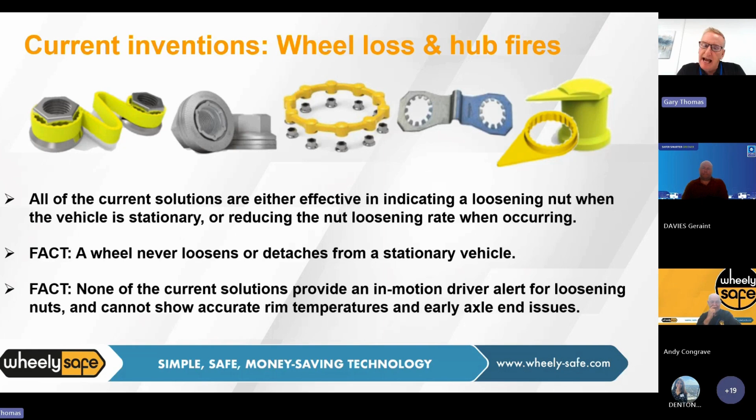And now what we've developed, and what we're rolling out globally due to the demand and requests outside the UK, we've got full connectivity. So engineers, the office staff, everything's fully transparent, to the point that you can set our systems up so not only does the driver get advanced notifications, the engineers now are getting advanced notifications before the driver even gets their preset alarms. So it's saving a fortune on breakdowns. But Andy will speak to you about the connected shortly.

Now, I've got a few gory slides coming up just to show you the gravitas. And we didn't realise how bad it was. Obviously, we live on a little island, and we didn't realise how bad the situation was outside the UK.

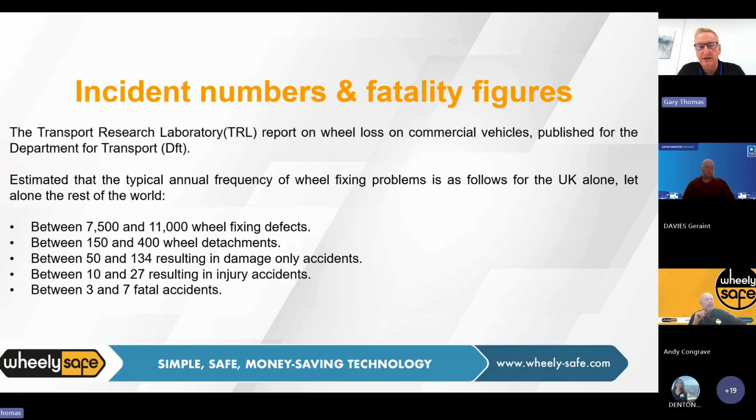But these are figures, documented figures within the UK. The unfortunate thing is, these are recorded incidents. I know, and our team have spoke to thousands of fleets over the years, and once they know where you're from, they open up and they do say - and I'll hold my hands up as well, I'm speaking from experience - if you can avoid reporting a wheel loosening or a wheel loss incident to the authorities, you will, because the last thing you want is them crawling all over your business. So I can tell you now, these reported figures you can probably multiply by 3 or 4. Obviously the fatalities and things like that you can't hide, but the wheel fixing defects is so much larger than what's reported.

Moving on to the next slide. Now, I've put these in here - these are just some of the fatalities within the UK. But beyond the UK, it's even worse. We're well governed and regulated by the DVSA and the traffic commissioners, but accidents still happen wherever people are involved. As I say, I've already hit you with the two scenarios, or there's mechanical failures involved. Things can happen.

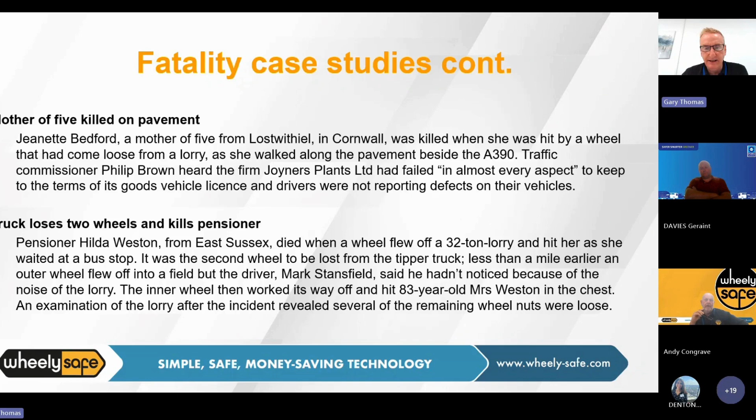Just going back - as I say, I've put these slides in there, but these are reported fatalities, unfortunately, that are out on the internet. The other interesting thing, as we've been going to various inquiries outside the UK, you realise the full gravitas of how big wheel loss and hub fires are.

We've got the no win, no fee solicitors and legals gathering pace within the UK. Litigation seems to be gathering pace. As I say, this is what's going on in America. In Canada, it's now in the majority of the states an absolute liability law for any wheel loosening or wheel loss - such is the problem over there - to a situation where it's fines of up to $50,000 just for loose wheel nuts.

A bit of good news for ourselves, and I can share this because it's out now - we've just been approved for Japan. Such is the problem in Japan as well. We've been doing trials for a period of time, and the Japanese government have now approved our systems for fitment in the Japanese fleet world, and they're funding our products to be fitted to Japanese vehicles as well. So it's not just a problem within the UK, it's a massive global problem that we finally close.

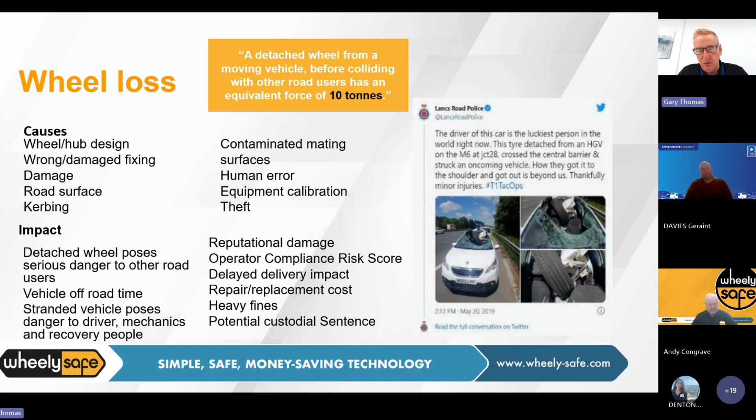That particular incident - the gentleman who was driving was about to take his 4-year-old son, who was on the journey as well, but at the 11th hour, for whatever reason, he declined. That particular truck wheel went straight through the window into the passenger side. The actual driver came away with just a few bumps and grazes, believe it or not. He was very lucky, but God knows what would have happened to the child in that particular incident.

Now leading on to - that's the wheel loss side of the business. Another interesting problem that we finally resolve is hub fires. Now I'm going to bring Geraint in, but I just want to quickly allude to this. There are situations, as I say, where this particular problem is more prevalent if you're not on top of your maintenance.

I went to a situation last year, and it was a double-decker trailer, and the operator told me that he'd had the hub fire, and he could have fitted our low-cost system, which would have alerted him to the fact. We believe it was a bearing failure, but what had happened - he said the actual incident had run up a bill up to £1 million for him because of the situation. He'd lost the load, he'd melted the motorway, the fire brigade came out to douse the fire, the water ran down into a culvert, so the guy had got environmental health all over him, the DVSA and the health and safety executive. But as I say, we can finally close that situation again now, because we've got something that covers every single reason behind that.

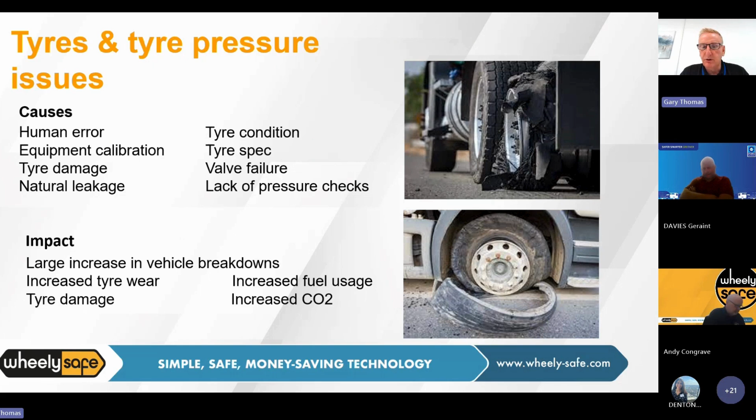The other cash cow as well is the tyre pressure monitoring system. The one thing I always say, even if you didn't have our system, is get yourself a TPMS system. It's the biggest cash cow going. I didn't realise the gravitas behind it, and I've run thousands of vehicles. God knows how much money I've cost the businesses I've been working for previously by not optimising the tyre pressures, reducing the life, and obviously the fuel wastage by running tyres on low pressure. It must be astronomical.

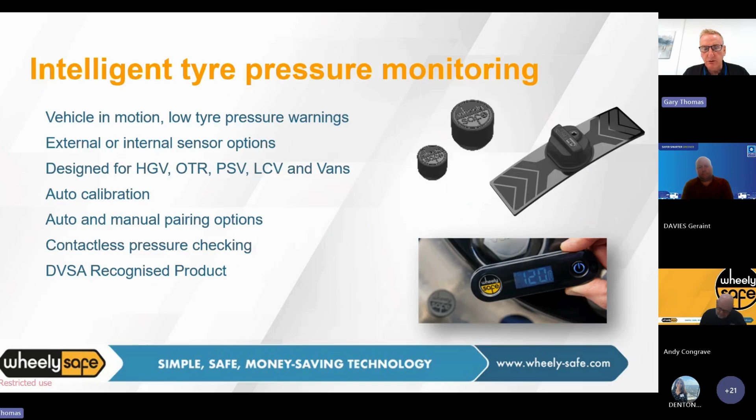So these, as I say, these are all things to move on with. Just moving on, I can talk to you about the monitoring system and the sensors, which we can explain.

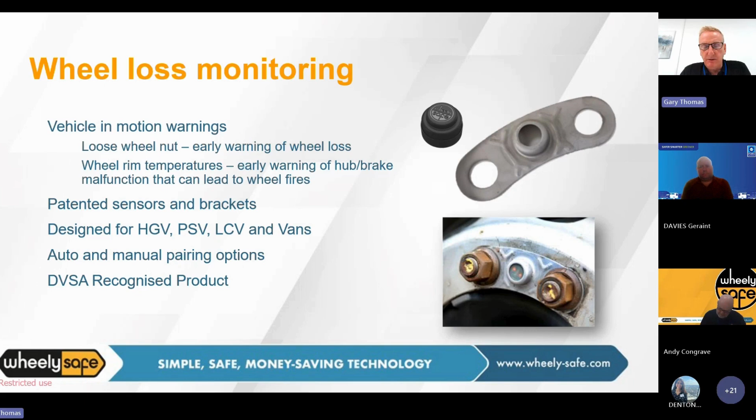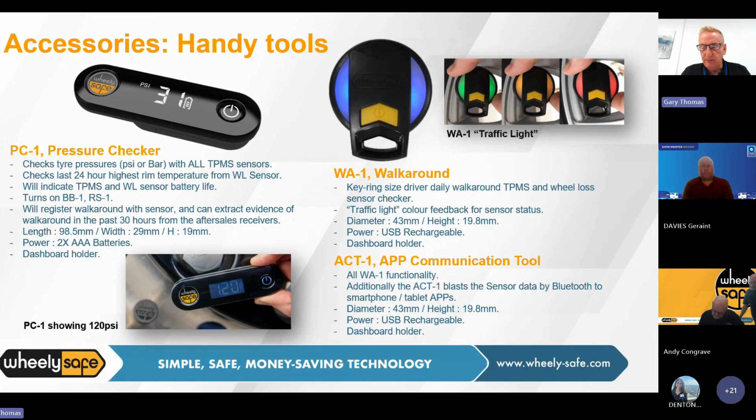We've also got some additional very low cost accessories for your drivers and your engineers. Again, we can delve more into those once you've come back to us. But I want to move on to the major part now. Now we've taken it away from the driver only system after many years, which is the Wheely Safe Connect system. So I'll pass this over to Andy now, if I can.

Will you be bringing your microphones off, Andy? Will you be bringing in the connected slide, or do you want me to? Yeah, I'll do it now. So if you come off. All right. Stop sharing. Okay. Can everyone see that? Yeah. Yeah. Good afternoon, everybody.

Thanks for your time. Okay, so what you'll be able to access from the vehicle, and this is one of our development partners, so they're quite happy for us to share this information. It's a very simple T-card system, and because of our background, we've designed it in such a way that it's only going to report a problem when you need to know. There's a lot more information behind the dashboard, but generally you'll get an alert which will come through on an email, and it'll also come through on the screen when there's a problem you need to deal with.

So as an example, if we click on a vehicle, we've got a typical 4x2 rigid here as an example. This has got 6 TPMS sensors, and it's got 8 wheel loss sensors, so 2 on every outer wheel. And as you can see listed here on the left hand side is the summary of the tire pressure monitoring sensors. Now we have got the capability of putting these sensors into a location, and that's a choice you can make locally. They will normally come displayed with an ID number, which you can then add the wheel location with a click of a button.

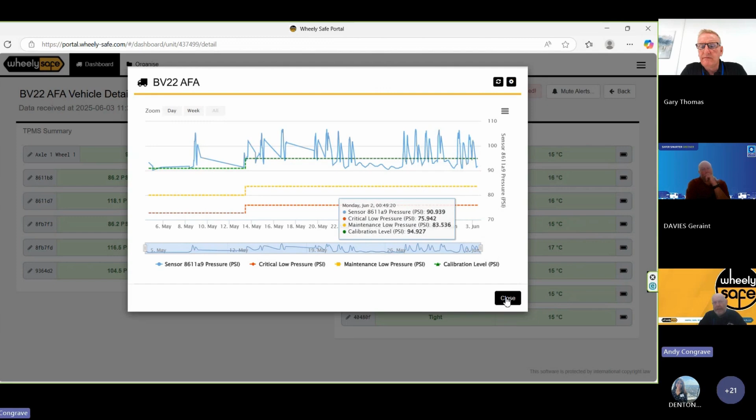You have got the capability of actually organising these parameters. There's an opportunity there where we demonstrate this to you. You can actually change the parameters of the alarms. The ones that are set there are the standard 12 and 20%. You can change them to whatever suits your operation or your business. In this column, we've got the current temperature of the tyre, and then we've got the battery life of the sensor. Again, all of these will send a message to you if there's a potential problem.

So, for instance, if you've got a pressure that's dropping slightly, you can look at that and make a decision of whether that's going to complete the journey before it becomes unsafe or unusable as a vehicle. Now, you'll see at the top, Gary mentioned earlier about there's an option. Our accessories, if they're used on the TPMS sensors, whatever time a vehicle check is done, this will be recorded and we can tell whether the vehicle's been checked in the last 24 hours, and that is auditable. So if we want to look at a vehicle that may have had an incident, we can look back at the data and prove that a driver did a walk around and at the time the tyre was in a serviceable condition.

The box itself will update every 30 minutes unless there's a problem, and then it's every 3 hours when the vehicle's stationary. So we can still get data coming through during the evening and the early hours so that you can identify a problem before the vehicle was due to be used out in service.

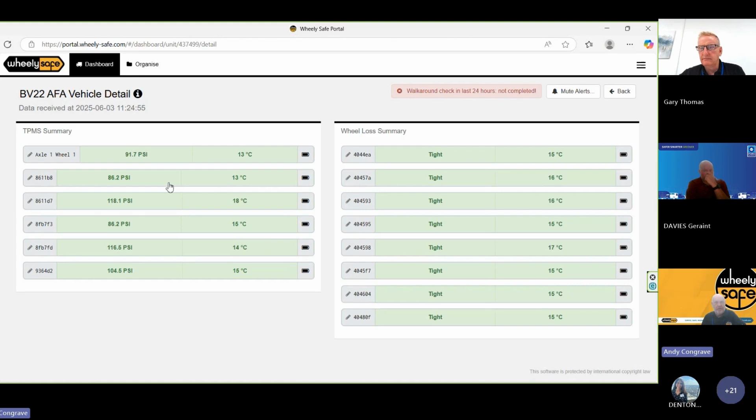This dashboard can be shared by as many people as you want in the team, and also the alerts can go to as many operatives within the business as you wish. Okay, I think that's it.

Just stop sharing that. Is that back to normal? Yep. Thanks, Andy. So I'll go back to sharing my screen. Bear with me. Is that back on, yeah? Okay. So I'll just get back to the connected stuff where Andy came in.

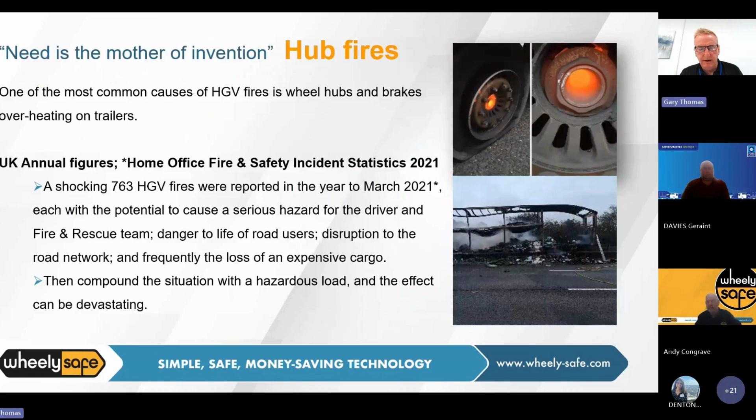So as Andy said and illustrated, everything we do is simple. Me and Andy and a lot of the team are all from the fleet sector ourselves. One of the groups I worked for, I employed a permanent telematics person who was just looking at TV screens. Didn't need to. We do offer drill down reports. You can micromanage your vehicles as much as you want to, but everything's simple.

We have a simple screen that offers alarms either on your computer or on your phone. You'll get an email. It's entirely up to yourself. And as I say, that's years of our fleet experience and speaking to a lot of fleet people, the issues they've had with some of the telematics screens. So simple's best with all of us. Hence why the products that we've developed, we've worked tirelessly on making sure that they're very easy to use and very easy to fit.

The other beauty with the systems, for example, our TPMS sensors, we designed them as a retrofit, which do have OEM applications, telematics applications. But when I used to cascade a vehicle out of my fleet, the OEM system used to go away with the vehicle. Ours is a plug and play system. So when you've purchased the products, they're yours for life. We're not a telematics company. The data cost is just a means to an end for us. That is cost.

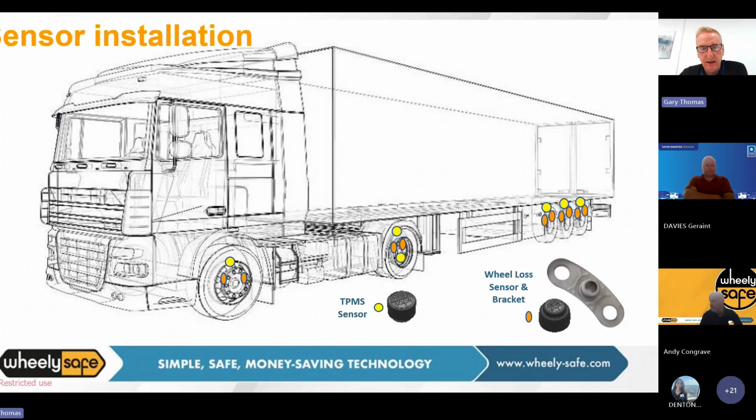So moving on, when we come out to fit the connected, well, we don't fit the connected system. It's easily connected by your engineers, but we do the training. It's just a matter of fitting a box and the in-cab display and then the sensors.

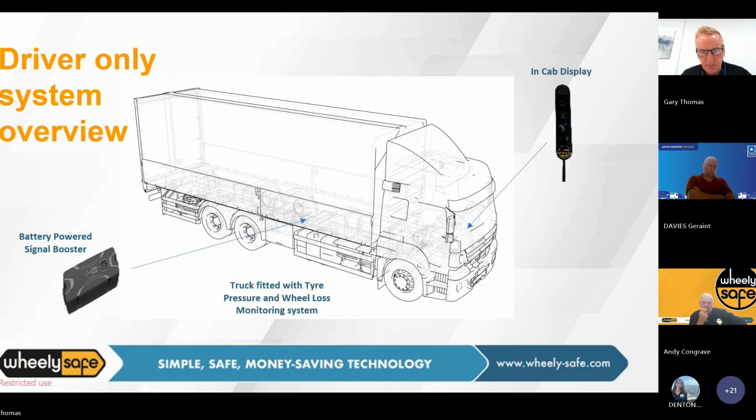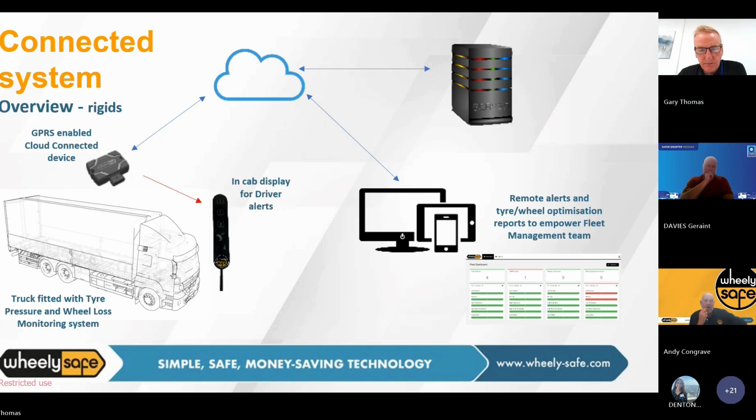And then what happens is that little M2C box, as we call it, machine to cloud, gathers the data from the sensors and flicks it up into the cloud, and we either connect to your existing telematics provider through API, or you come through our system if that's your preferred route. And then, as Andy's already alluded to, from that you get all the data.

But what we're allowing the driver to do is activate the sensor, and that key ring works on a traffic light system. It either goes green, amber or red. Green means the tyre's good to go because it's still within the pressure you set it at. Amber, as Andy said, it's dropped 12%, or if it's red, it's dropped 20% or more.

But what it does, once the driver has checked all the TPMS sensors, it activates to say back at the office that the driver has undertaken a full walk round check, because they've had to physically activate the TPMS sensors. Now, I used to do gate checks with my fleet managers, and I used to argue the toss with the traffic commissioners on this, and fair play to them. I'm not saying it was down to me, but they realised that the driver has a duty of care just as much as the operator.

Because it used to grieve me that when that vehicle leaves the yard, goes down the road and gets pulled by the DVSA, and they find a driver related defect, it goes onto your OCRS score, which used to grieve me because I could be a green operator flipping into amber on the back of a driver not undertaking their duties.

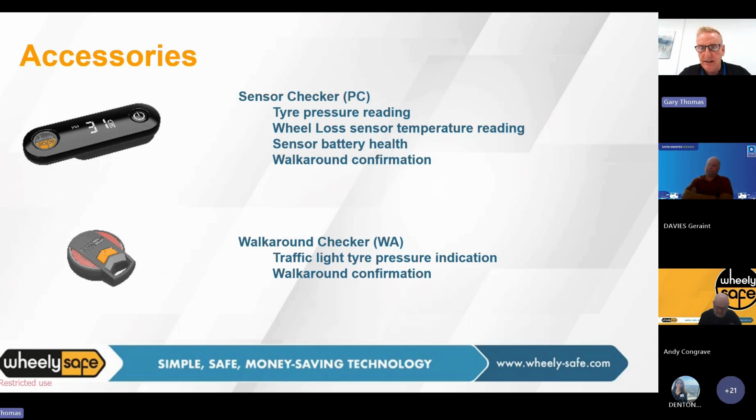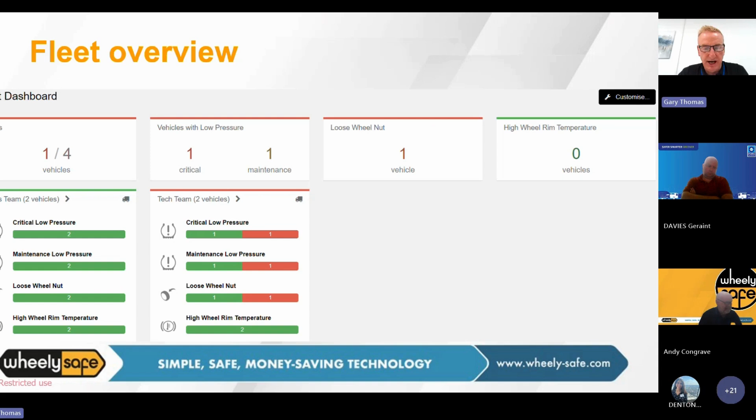So these are some of the remote reports that you get from the system that Andy's mentioned. These are obviously when there's an alarm state, you can flip the report so you only get the alarms on that particular screen. It's entirely up to you. We've made the screens totally friendly and interchangeable to what your requirements are. And as I say, Andy's already alluded to the sensor data.

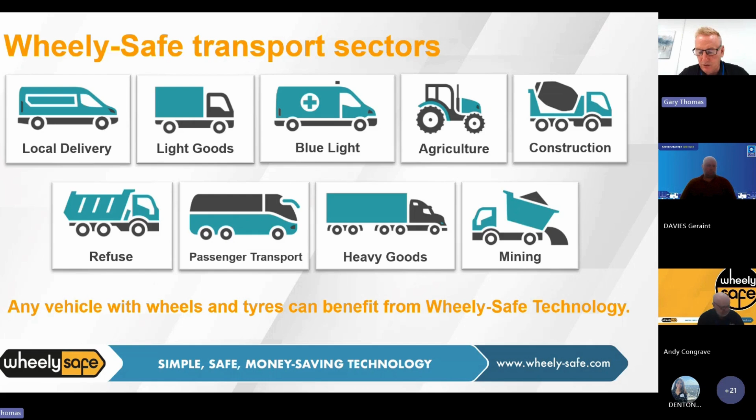A couple of things that we have got, just finishing off, a bit of good news stories. We're one of only a couple of fleet safety products that have been accredited by the DVSA. It's never happened before. It's never going to happen again because they've shut that window. But it's a bit of a stamp of approval of where we are. I think we were recognised because we finally closed wheel loss and hub fires for good.

And I don't know, people on this webinar, if anybody's anything to do with dangerous goods vehicles, we've now got ATEX certification, which is a globally recognised certification for dangerous goods fleets.

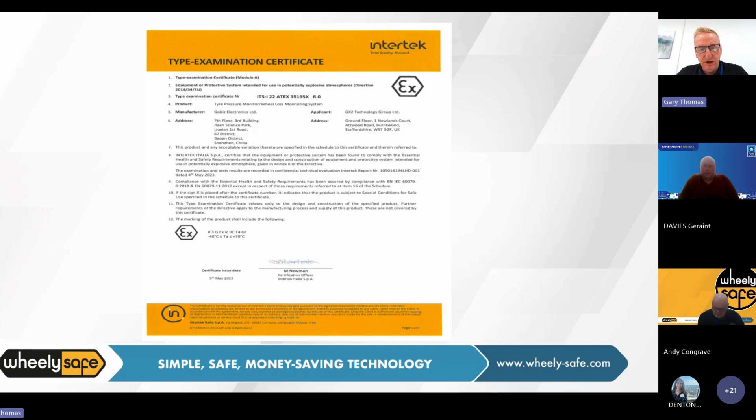So all our sensors now have been certified for operation in dangerous goods environments, whether it be oil, gas, petroleum. So that's something else that we're pursuing globally.